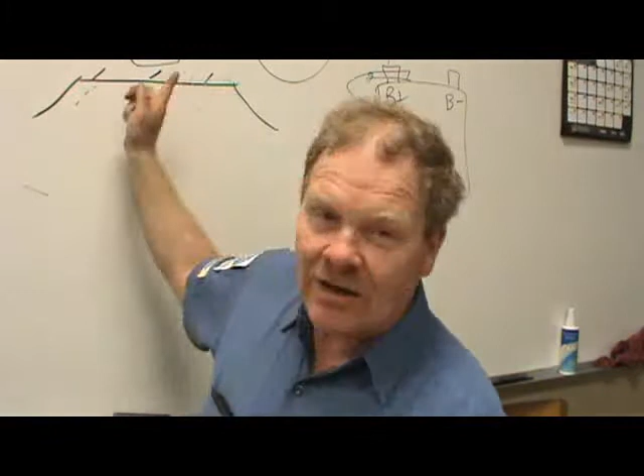Now that's something nobody - you could talk to 100 mechanics and they wouldn't know it. I mean if you tell them that, they just absolutely wouldn't know it. You could actually put some shims some kind of way behind the radiator so that they couldn't see it, and bring it in so those fan blades were not exposed. In other words, you should be seeing half of the fan blades when you look down on it from above, and not seeing that would overheat the vehicle.

I've seen that, I've been there, I've fought with that. This guy put a radiator on his Ranger that was bigger - he put a bigger, thicker radiator on it, and that fan was up in the shroud.

We worked on that son of a gun for a long time trying to get it to overheat. Then the shop foreman came and said we had some trouble with some vans that were built wrong - the fan was totally submerged in the shroud. Because those fans were totally submerged in the shroud, those things were overheating.

It's got platinum plugs in it. Were these wetter ones? I mean, you got some that are really wet. No, not really, they're all about like that.

Did you start it up before you pulled them out? Fire it up and let it run - put the plug wires back on it good enough for it to run. Fire it up and let it run for like 30 seconds or a minute, whenever you know that it's... it's probably gonna be skipping and whatnot. Switch it off, then jerk them back out and let's see which ones are wet. I'm not saying get the car hot, but I want to know which ones are wet because we got injectors dripping.

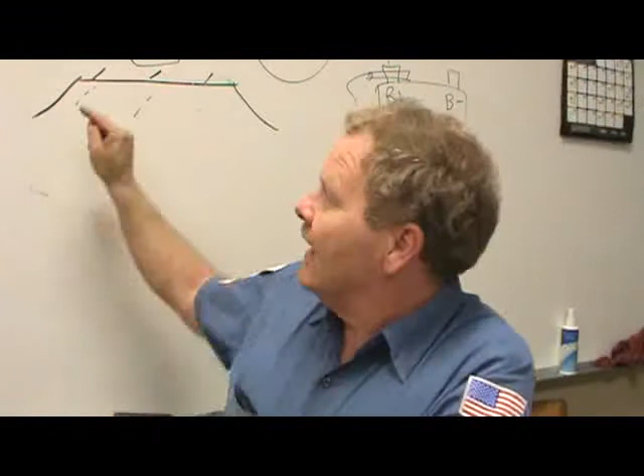What I did was take the radiator shroud off and mark it with a piece of masking tape, then got a high-speed cutter and cut that shroud so I exposed half of them fans, and that took care of the problem.

It's not getting any air. I can't explain the dynamics, but it seems to me like it'd be like a wind tunnel pulling air better if the fan wasn't submerged. It seems like it'd work better that way, don't it? But it doesn't - I guess it's got to spread the air out or something, or some way it's trapping the air in there, and it winds up not getting good airflow through there.

Is the fan blowing new air to the engine, or is it pulling old air? It's pulling it through the radiator.

If you ever see one overheating driving down the road, but it won't overheat sitting still with the electric fan running, put a piece of newspaper in front of the radiator. If it blows it away, you know they've wired the fan up backwards. A lot of these electric fans come with pigtails sticking off of them, and you're supposed to wire up the fan so it's pulling air through instead of blowing the other way.

Okay, you got that? Now then, the engine that pushed those buggy-looking cars Henry Ford built was designed to percolate water out of the block through the cylinder head, up a pipe into the radiator, so the air passing through the radiator would absorb the engine heat and lower the temperature of the water before it went back to the block.

You might notice on some of those old flathead engines Henry Ford built, the cylinder head was a flathead, and they had a water outlet. It started way back here, came up there, and that hose went into the top of the radiator. As this engine was creating heat, it was like a coffee pot - the radiator was over here, fed back in here, and as it percolated, it pushed water up here and kept coming down here, and you'd get cold water coming in at the bottom.

That variable geometry turbocharger is a smart box, and it's got a CAN bus - controller area network bus - that it communicates with the PCM. The PCM requests a different turbo angle. If that little thing is too hot, it's going to say - and that's this part you're seeing right there - if it's too hot, it will tell the PCM that it ain't getting nothing in the way of a turbo angle change until such a time as the PCM has got to turn on that coolant pump. It's got a special coolant system.

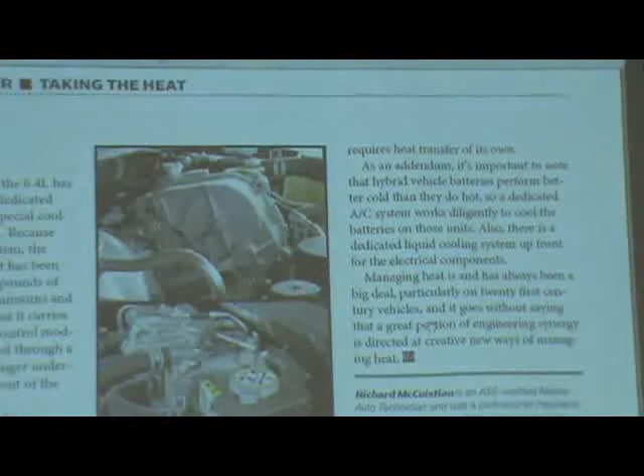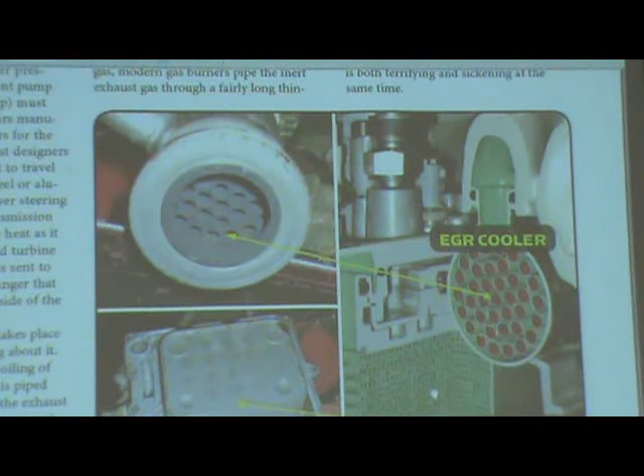That's the oil cooler, and it's basically got pressurized lube oil flowing around it in there, and it's got antifreeze where the green is all around the outside of it. Now see this long tube - look at the tube, guys, see that tube? That long tube is what's going to cool your EGR.

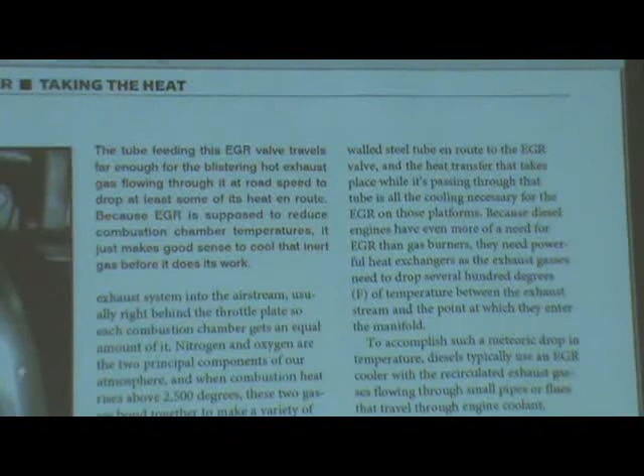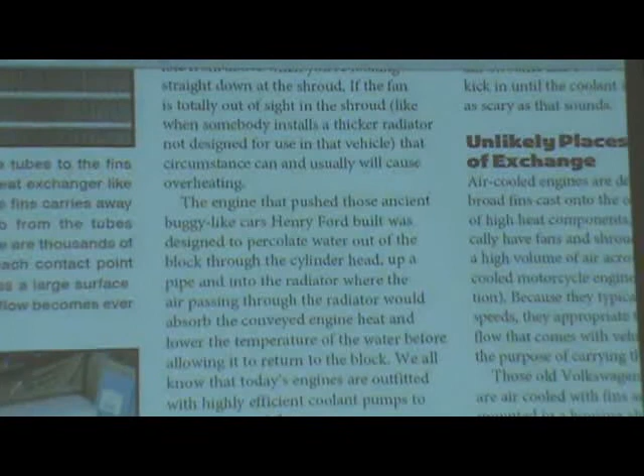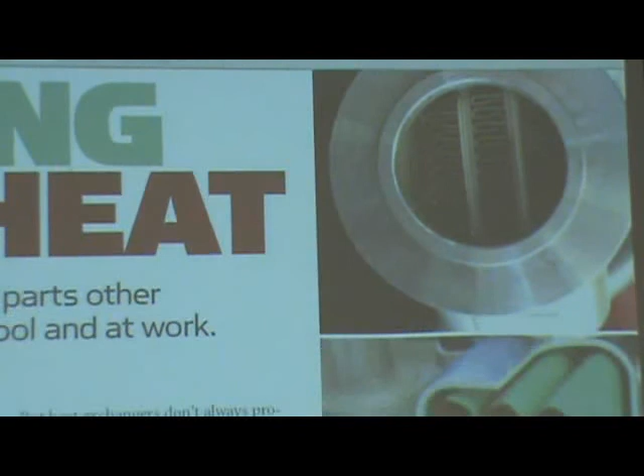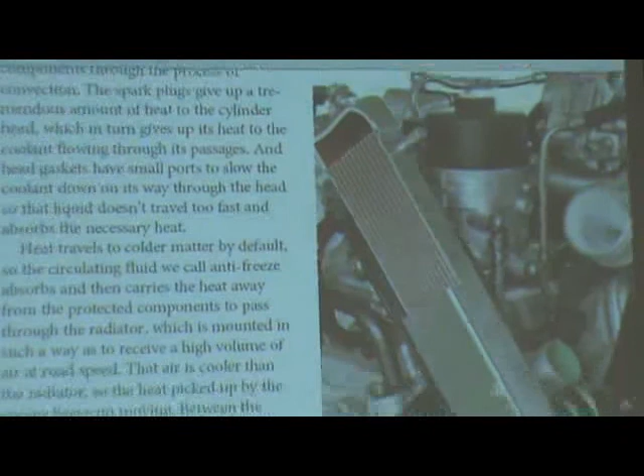I'm going to zoom out. All right, now let me come up again, I'm going to show you another thing. The newer heat exchangers on your 6.4s look like that, and they were really crappy - they had a tendency to fail a lot, and they would mix the water and the oil. There's the vertical heat exchanger on the 6.4. There's a temperature sensor measuring that gas going into that thing, and another one measuring it coming out. And that's what a heat exchanger looks like up there on the top.

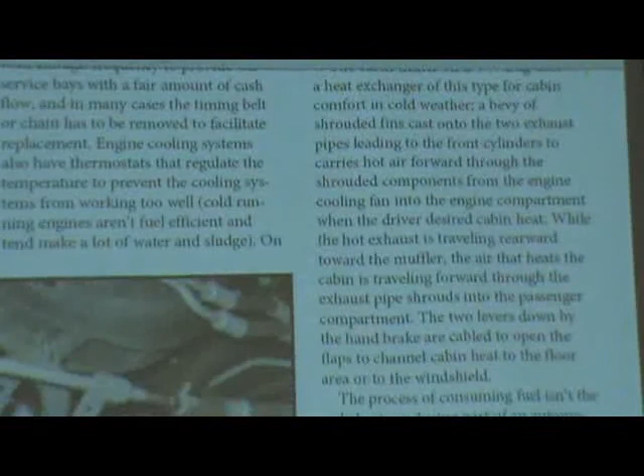All right, so I just wanted to show you those pictures after I talked about all of that. Look at this - what flows through that? What flows through that line right there? Steering fluid, power steering fluid.

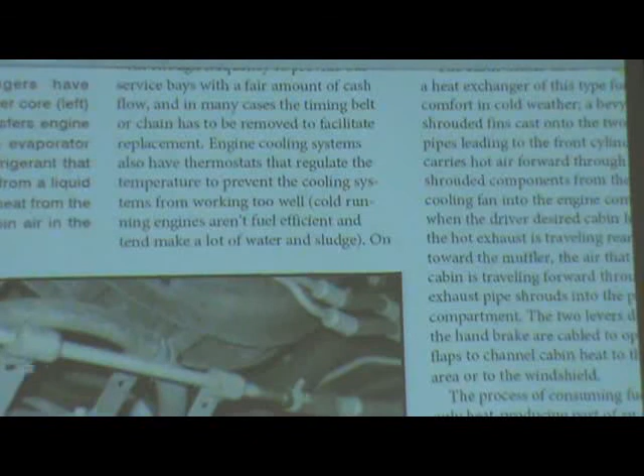See how a lot of people look at stuff, they don't ever think about what they're looking at. If you see that, you're going to notice the reason they take that all that way and go back that way - they went to a lot of trouble to put them brackets on there. By the time that power steering fluid goes from where it started to where it's going, it's going to drop some heat.

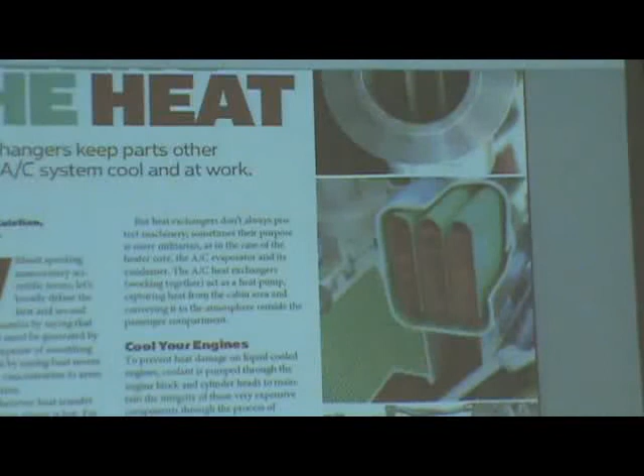What kind of pressure does a power steering pump put up? Brake fluid style pressure - well, 1,200 pounds. I mean, it's slightly lower, but anyway, okay, so that pretty well changes that.